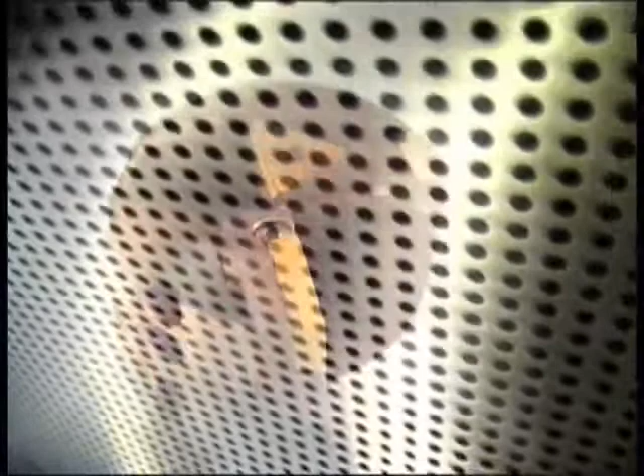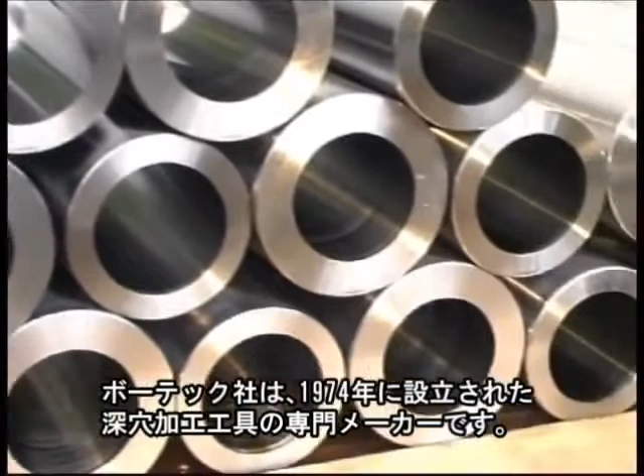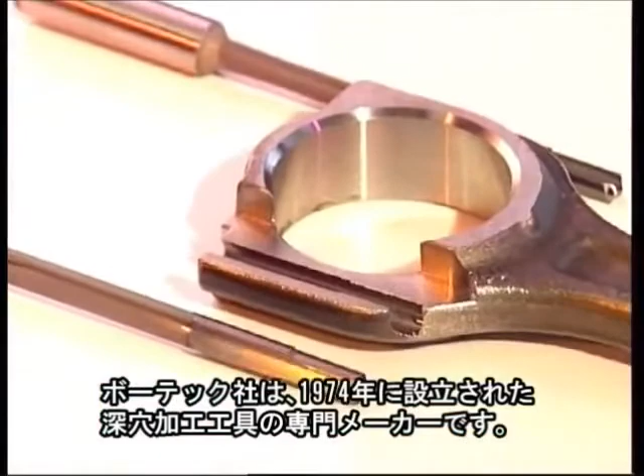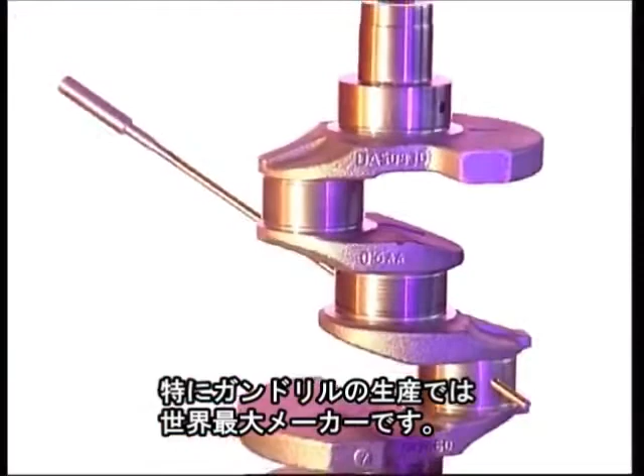Expertise, reliability, quality and flexibility. Since 1974, Botek GmbH has been the market leader in the development and production of deep hole drilling and boring tools. The principle of replacing what is good with what is even better ensures that Botek innovates products for a wide range of tasks and applications in the field of deep hole drilling technology.

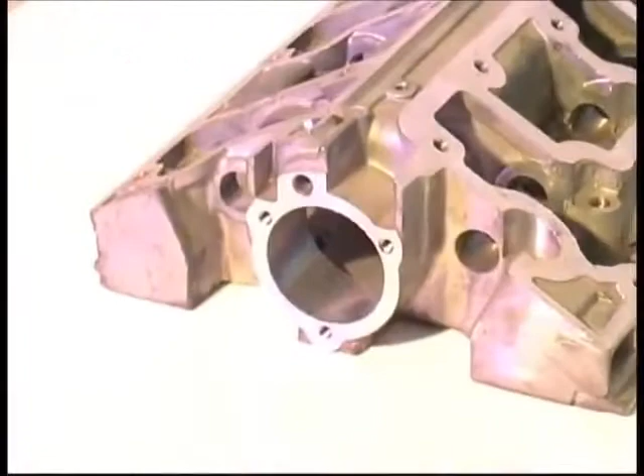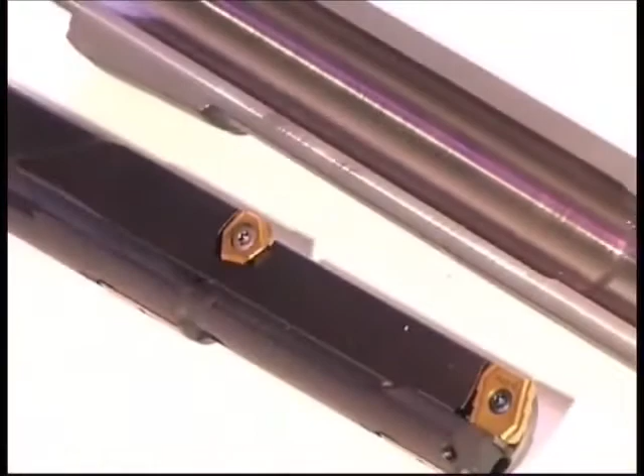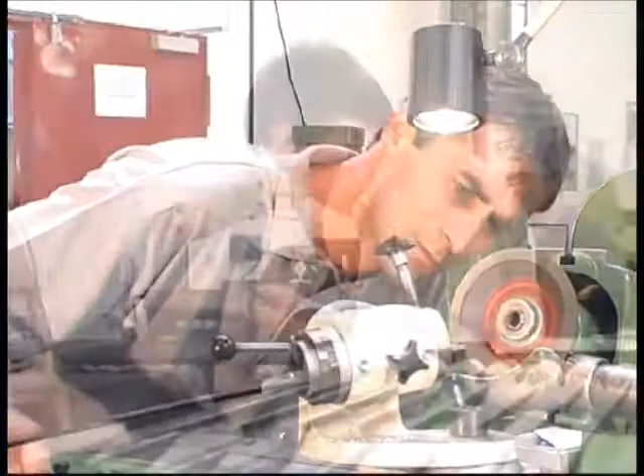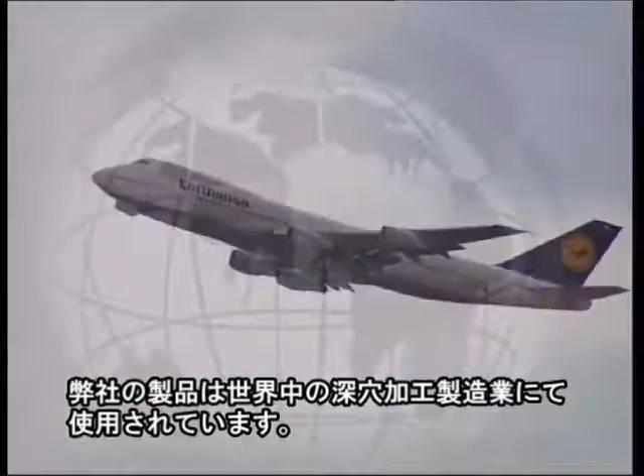In addition to the company headquarters in Riederich near Stuttgart, Germany, Botek has production plants in France, Italy and Great Britain, as well as agencies worldwide. Botek employs 300 people worldwide and exports its products to countries on all 5 continents, and is the world leader in the manufacturing of high-performance deep hole drilling tools.

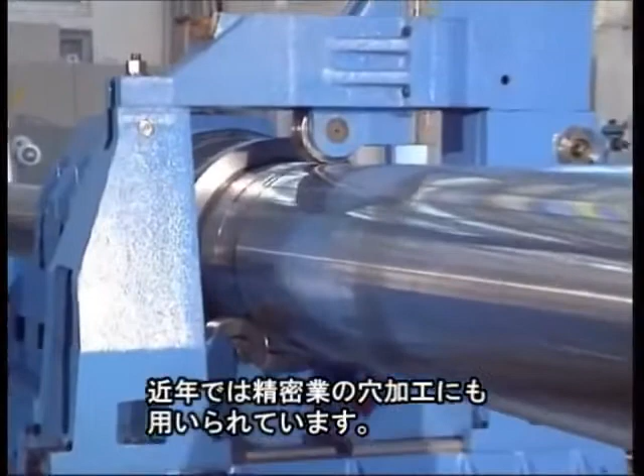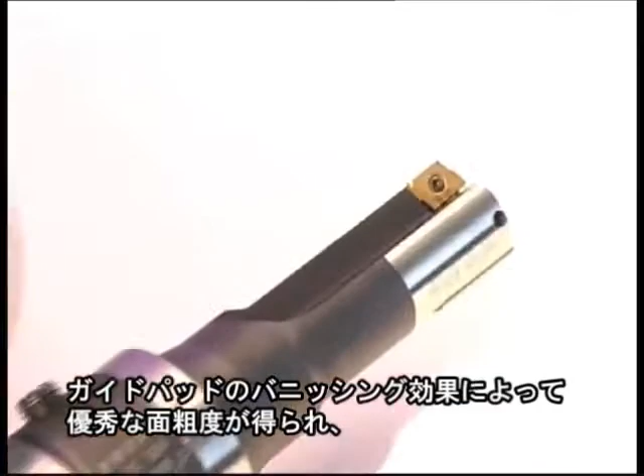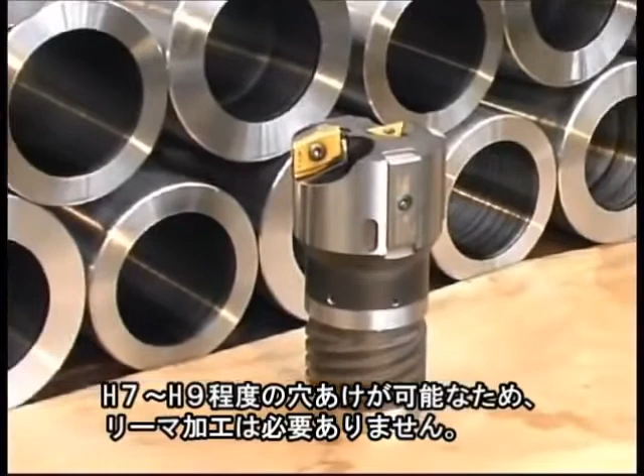Deep hole drilling technology is not only restricted to the production of deep holes. Botek tools are also increasingly being used in the production of precision holes. As a result, in many cases, there is then no need for additional fine boring or reaming operations. Most modern metal machining, where precision drilling is required, should consider Botek drilling tools for the production of deep or shallow precision holes.

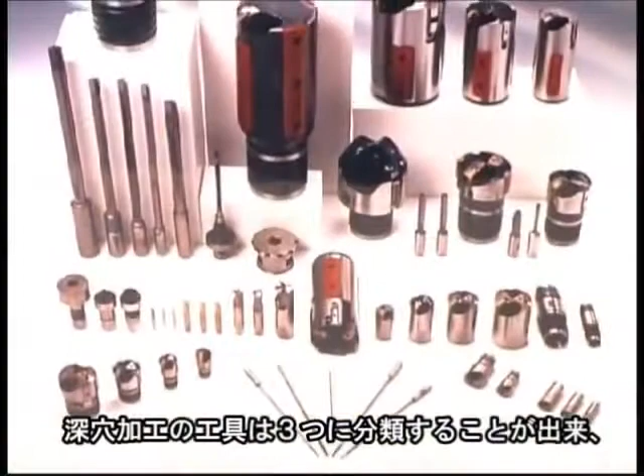A distinction should be made between the 3 deep hole drilling tooling systems: the gun drilling system for diameters of 0.7 to 80 millimeters, the BTA system for diameters of 10 to 500 millimeters, and the ejector system from 18.4 to 200 millimeters.

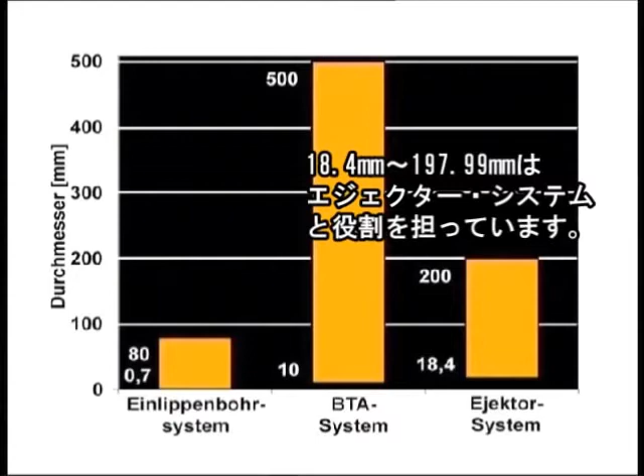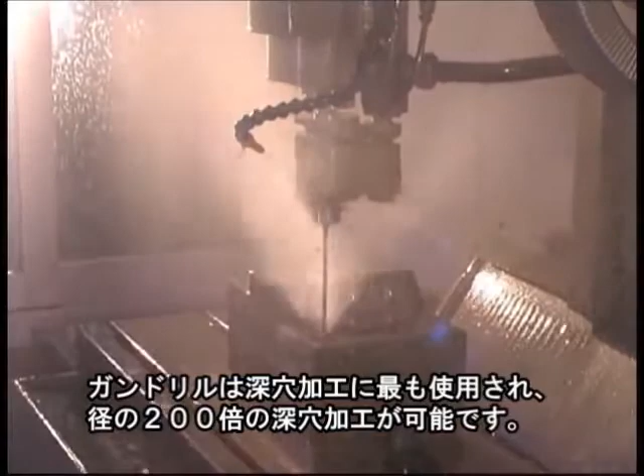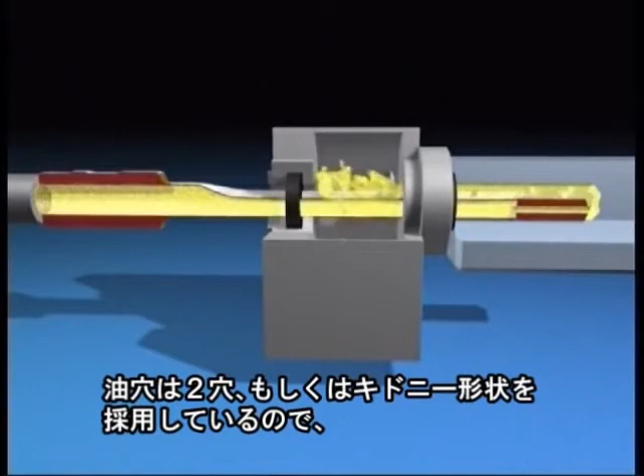The gun drilling system is used most frequently. With Botek gun drills, depths of up to 200 times the diameter can be achieved. The decisive factor here is providing the tool with a sufficient supply of a suitable coolant lubricant, preferably an extreme pressure neat cutting oil which is fed under pressure through the inside of the tool.

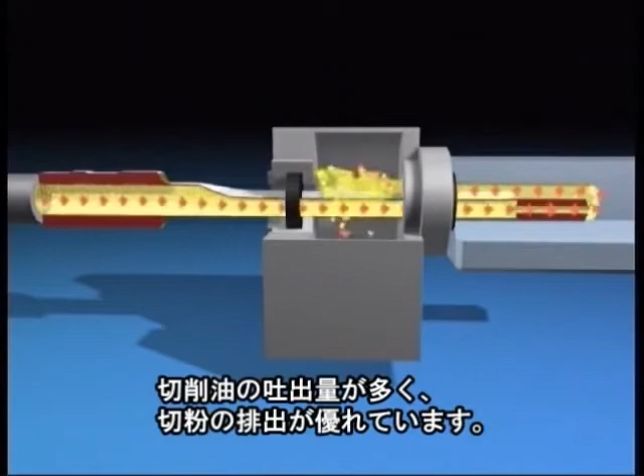In addition to cooling and lubricating the tool cutters and guide pads, the cooling lubricant serves to efficiently remove the chips down the drill flute.

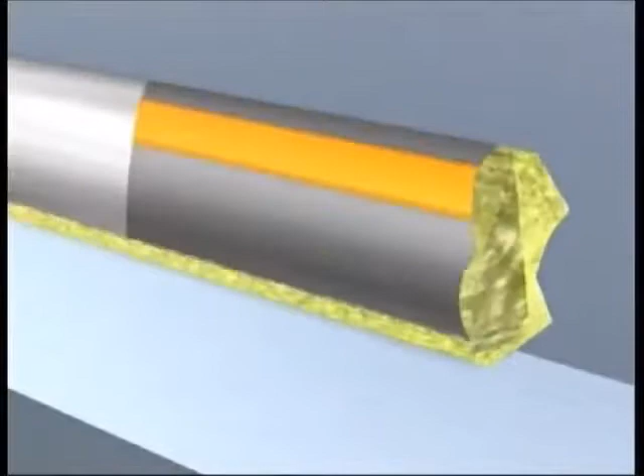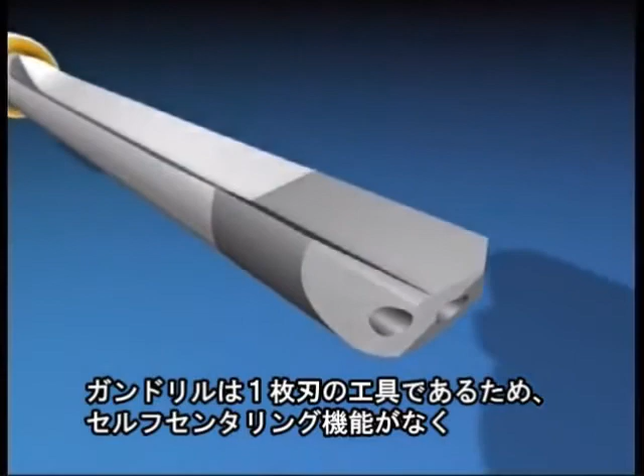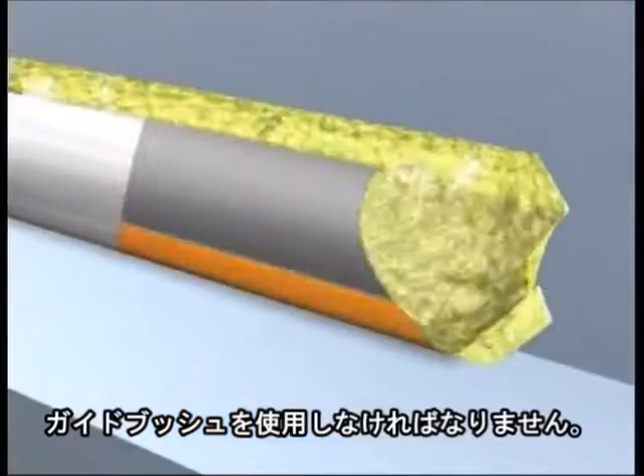The gun drill is a single cutting-edge drilling tool. Since it is not a self-centering tool when starting the bore, it has to be guided through a starting bush. After that, the tool guides itself by means of the guide pads on the drill head. As a result of the cutting forces, the guide pads are pressed against the boring wall, and this results in the characteristic burnishing effect to provide excellent surface finishes.

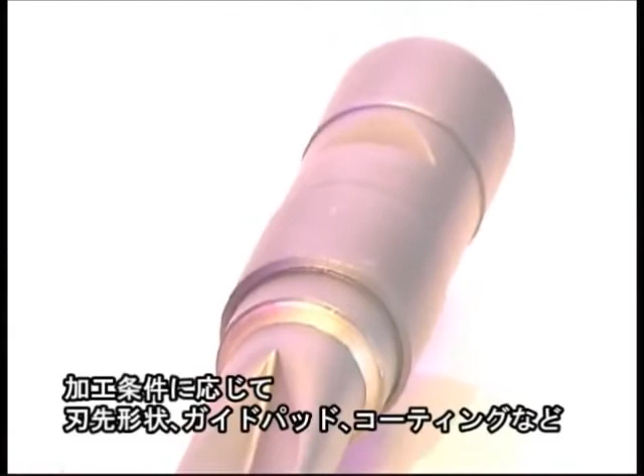The classical Botek gun drill consists of a crimped tubular sleeve with a soldered carbide tip and a clamping sleeve. Depending on the conditions for use, the cutting tool geometry and arrangement of the guide pads on the boring head can be modified.

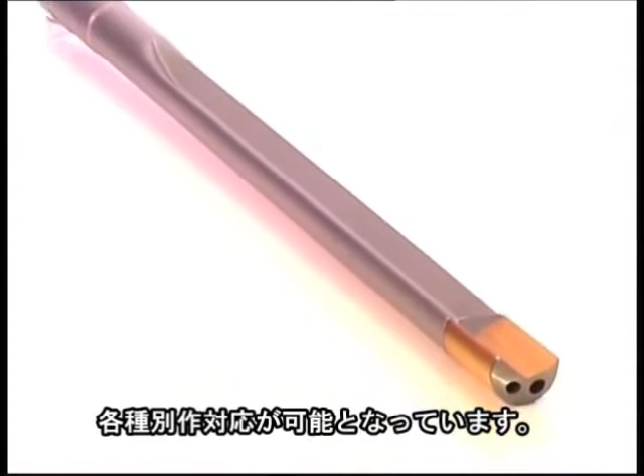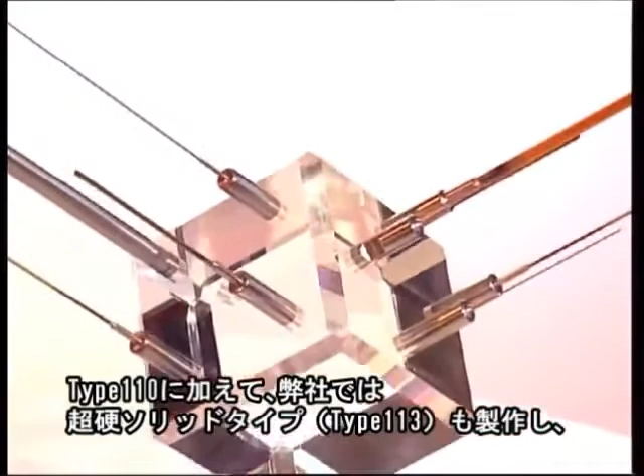In order to further improve the drilling quality, Botek gun drills are also available in a variety of coated versions. In addition to classical gun drills, Botek also offers gun drills made of solid carbide.

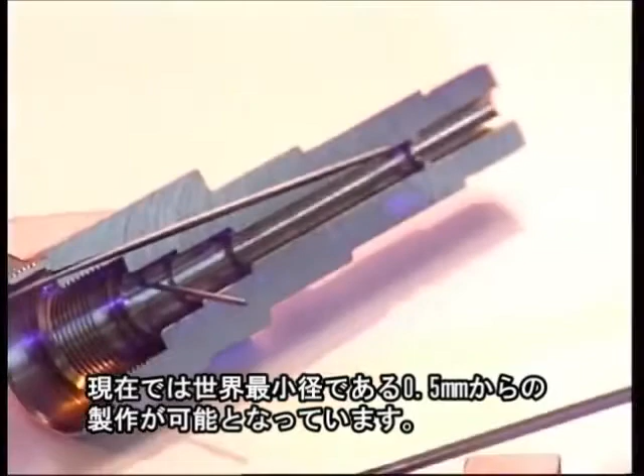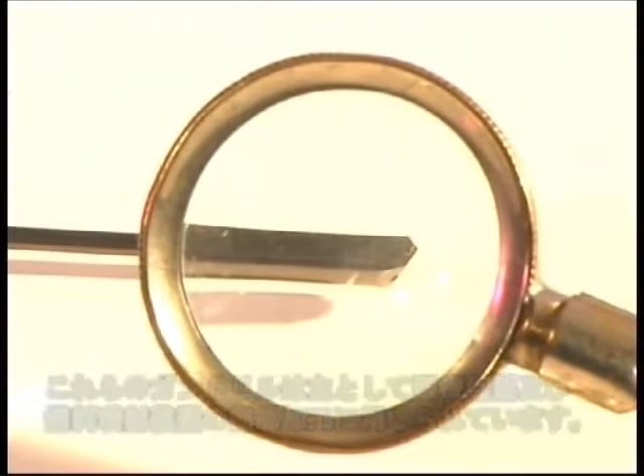As early as 1982, the company was manufacturing solid carbide with a diameter of 3.2 millimeters. The success in the marketplace made it possible to develop these tools with ever smaller diameters. In 1989, the first 1mm gun drill was manufactured. Today, Botek manufactures the smallest solid carbide gun drill in the world, with a diameter of 0.5 millimeters. These drills are used mainly in medical technology and the production of parts for fuel injection systems.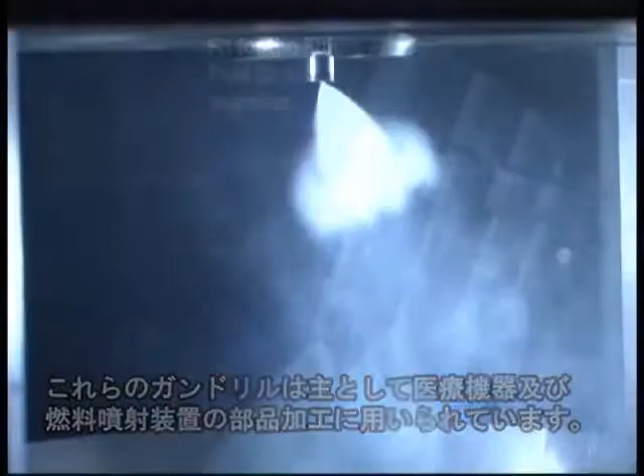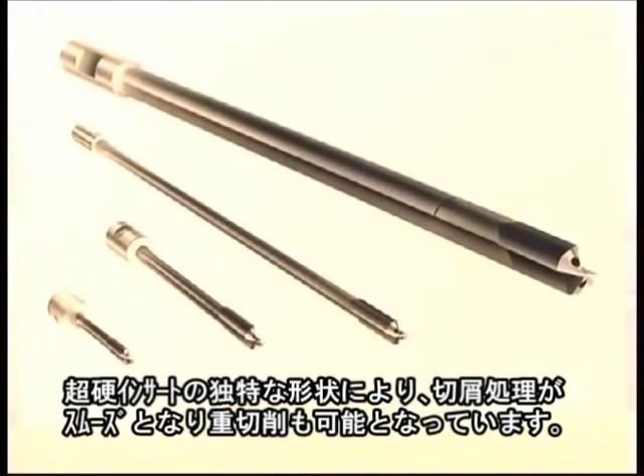For larger diameters, gun drills with indexable inserts and guide pads with a diameter ranging from 18 to 80 millimeters have also now been introduced to the Botek drilling program. The sophisticated cutter geometry of the indexable inserts means that optimum machining results can be achieved on these larger diameter gun drills. Twin fluted drills complete the product range in this area.

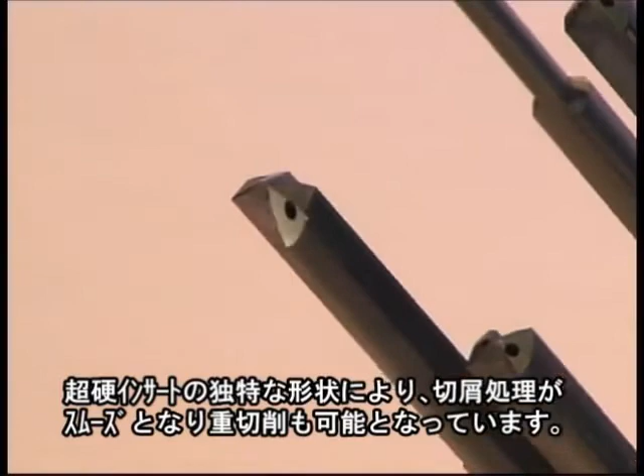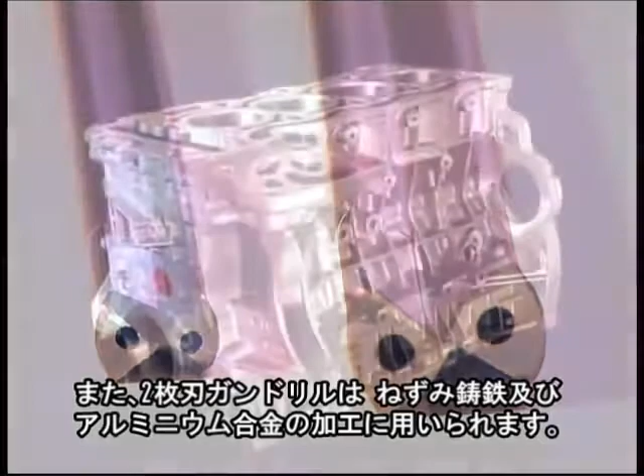The tools also work on the gun drilling principle with internal coolant lubrication supply and external chip removal. They are characterized by their especially fast machining performance. Botek 2-flute drills are used exclusively for the machining of grey cast iron and short-cutting aluminium alloys. The tools are available in a solid carbide version as well as conventional soldered carbide tips.

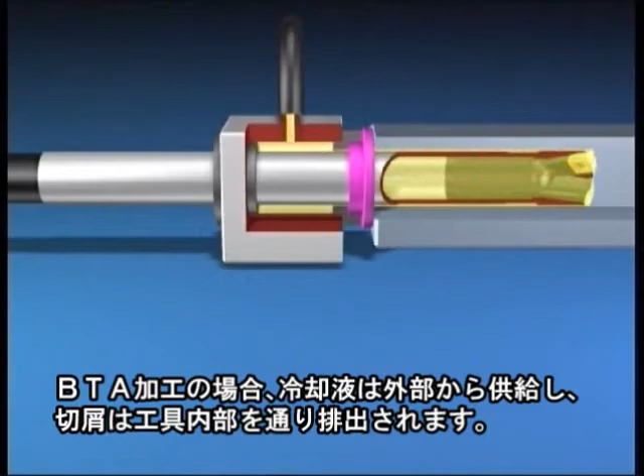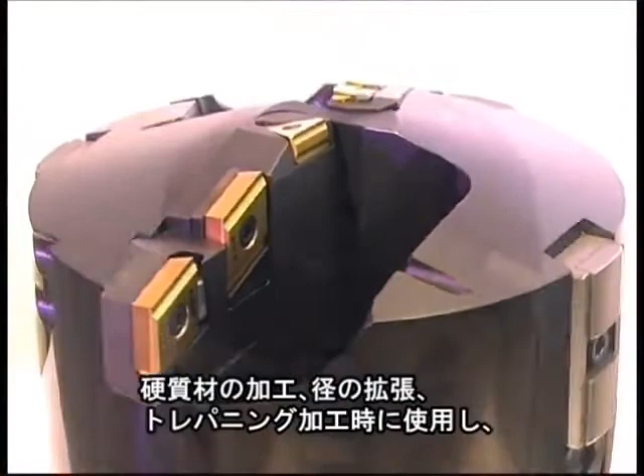In the case of BTA drilling tools, coolant is supplied from the outside. Under pressure, oil enters the annular space between the bore wall and the boring bar. The chips are removed through the inside of the boring tool. Tools can be supplied for solid drilling, counterboring, and trepanning.

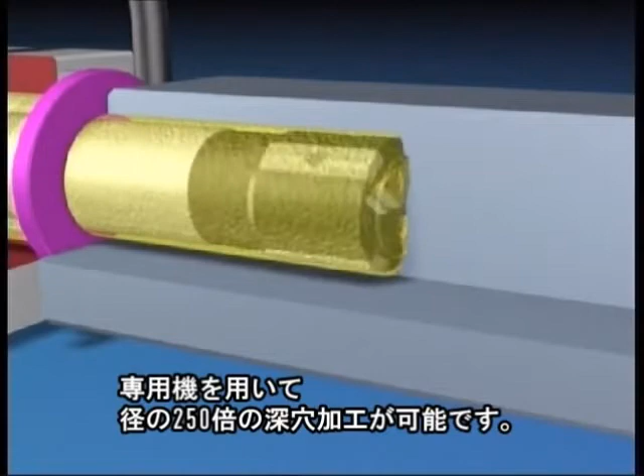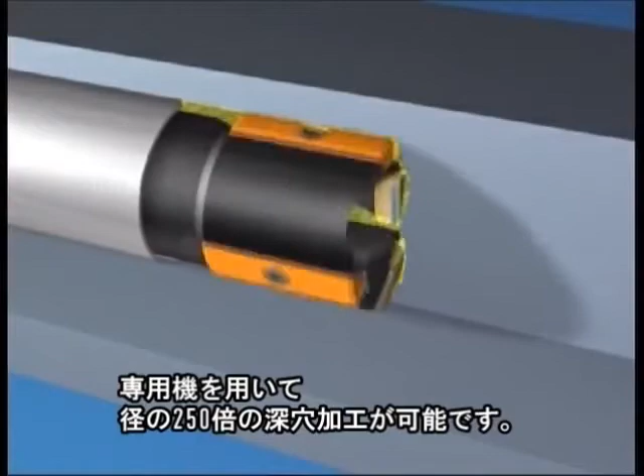The BTA technique is used exclusively on deep-hole boring machines, permitting drilling depths of up to 250 times the diameter. BTA drilling tools are characterized by their high machining performance, providing precision hole geometry and the minimum run out of the bore produced. Botek BTA drilling tools are available from a minimum diameter of 18 millimeters with indexable inserts and guide pads.

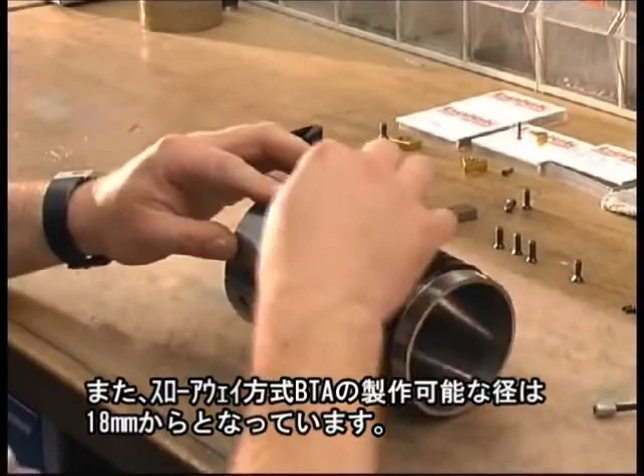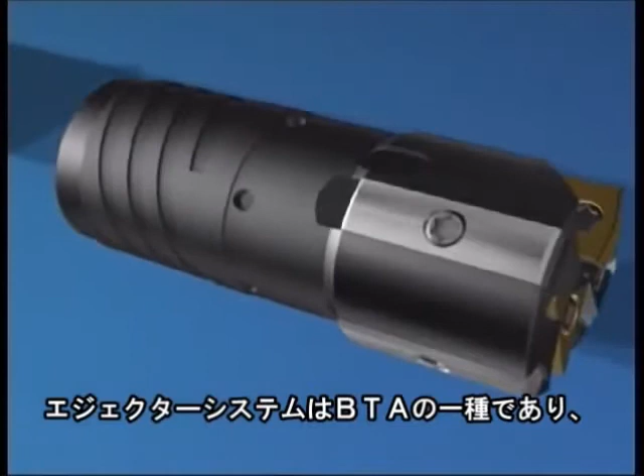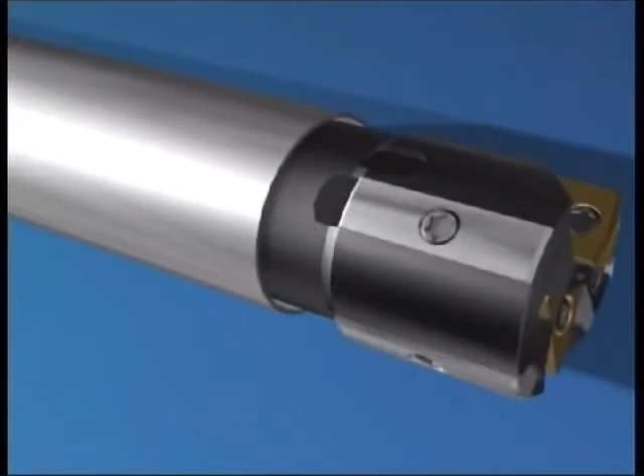The ejector drilling system is a variant of the BTA principle. The necessary tools are supplied by Botek in the diameter range from 18.4 to 200 millimeters. The method is mainly used on conventional machine tools as no sealing is necessary between the workpiece and the drill bush. Ejector drilling is especially suitable for use on turning machines, milling and horizontal boring machines.

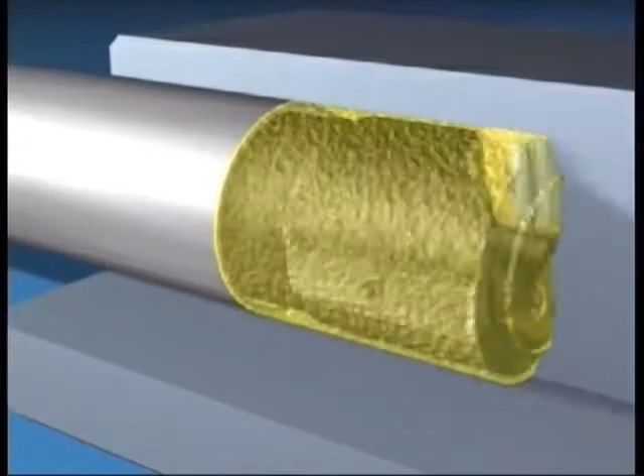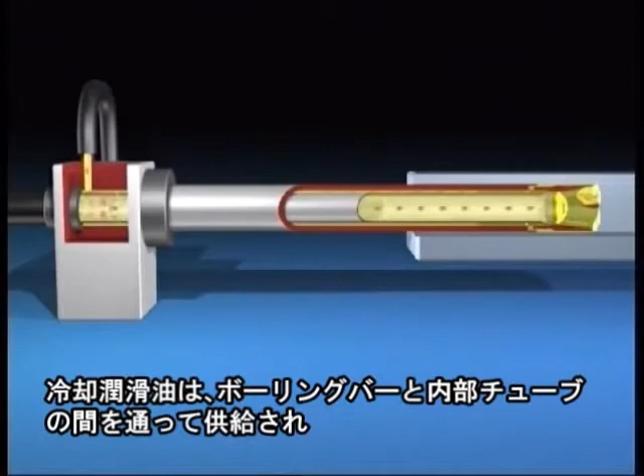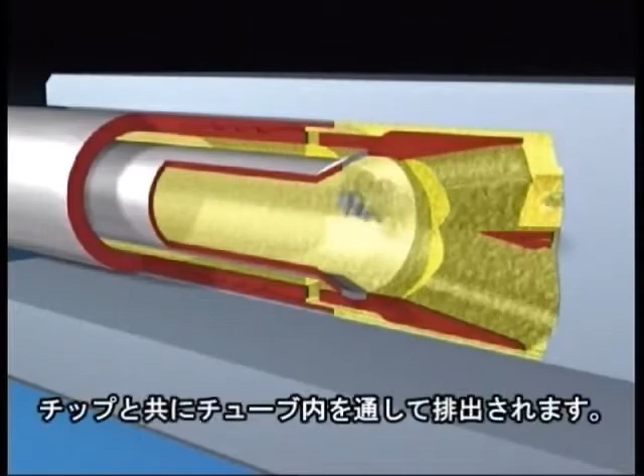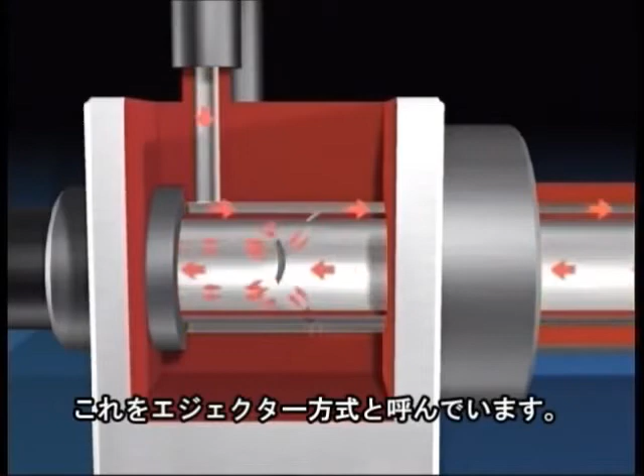The coolant lubricant is supplied through an annular space between the boring bar and an internal tube. The oil comes out at the side of the boring head, and this removes the chips through the internal tube. The lubricant is injected directly into the internal tube via an annular jet. As a result of the low pressure on the chip mouth, the cooling lubricant is removed together with the chips. This is the so-called ejector effect.

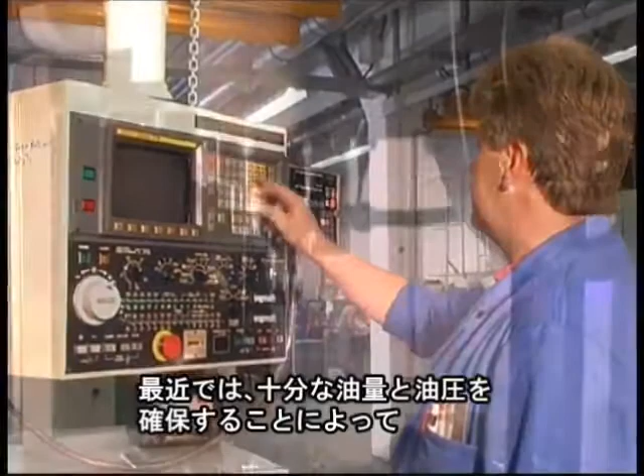To an increasing extent, deep-hole drilling tools are also being used on modern CNC machining centers and lathes. It is essential that the machine in question is equipped with a sufficient coolant volume and pressure. To start the bore on a machining center, gun drills need a guide hole in the workpiece.

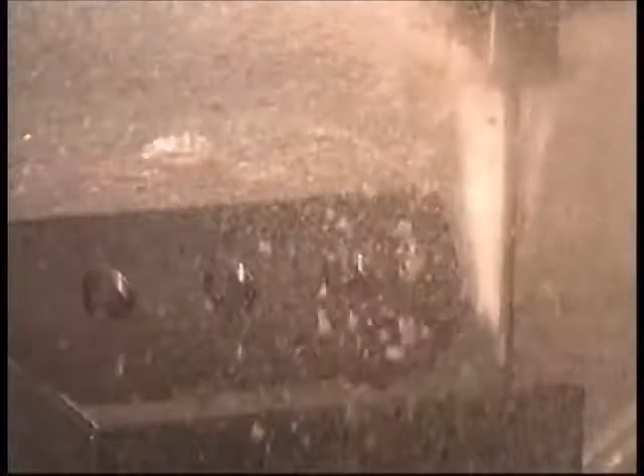During the drilling process, the chips are washed out of the hole together with the coolant lubricant. In this way, drilling depths of up to 40 times the tool diameter and more can be achieved without separate chip removal. In order to guarantee the highest possible process dependability, the correct choice of tool in combination with the individually appropriate cooling lubricant is of prime importance.

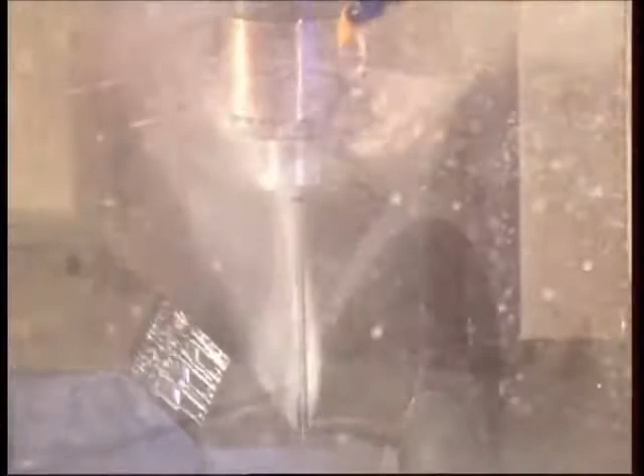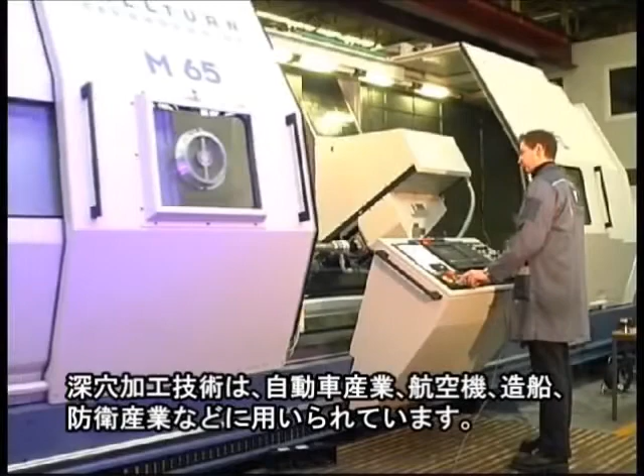Application areas for deep-hole drilling technology are the automotive industry, aircraft, hydraulics and pneumatics industries, as well as shipbuilding and defense technologies. Here, Botek is constantly setting new standards for industry. As part of this development, Botek is cooperating with leading machine manufacturers and other users, both in Germany and in countries all around the world.

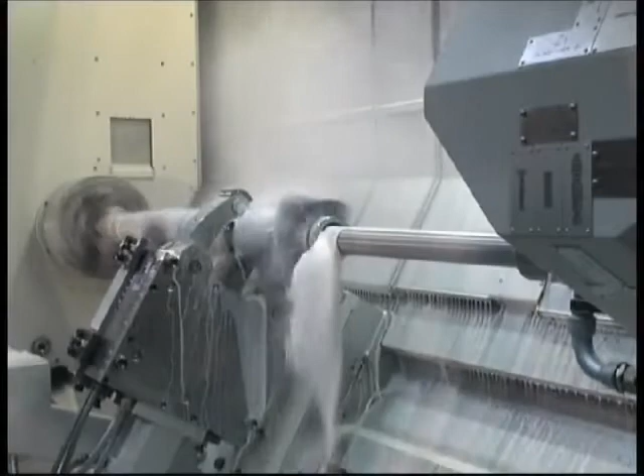A high quality standard is necessary to do justice to our customers' requirements. With the production of economical and technically advanced deep hole drilling tools and certification according to ISO 9001, Botek is systematically meeting the requirements of the international marketplace.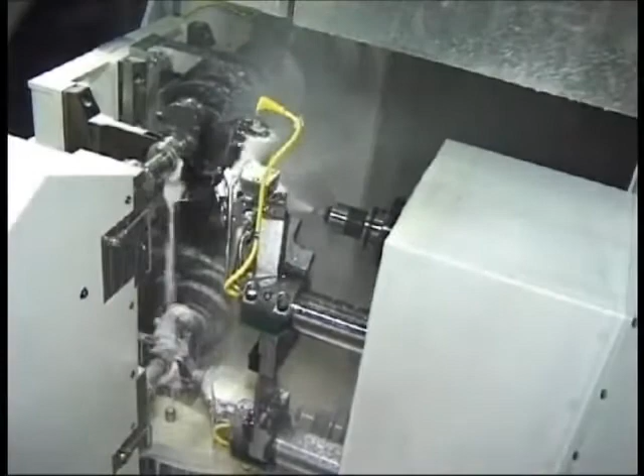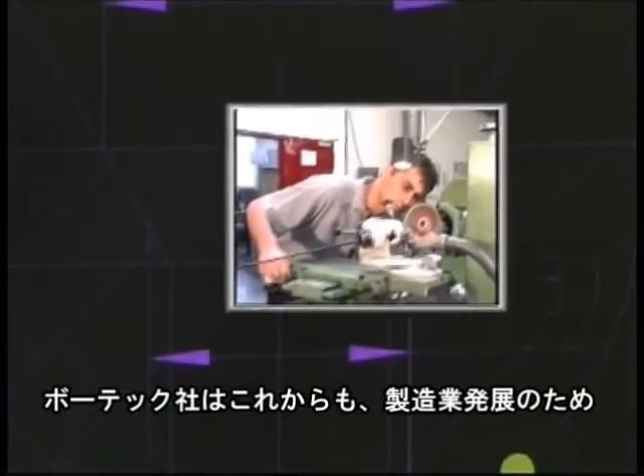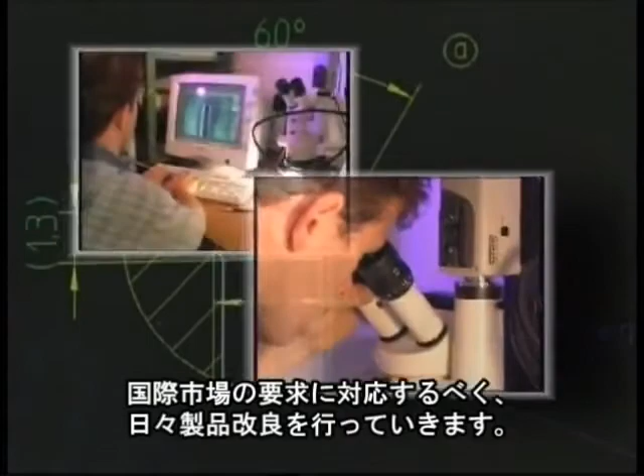The hallmark of Botek is practical-orientated research and development work. The necessary know-how for all members of staff is provided in special training sessions. The training of tomorrow's engineers at our headquarters in Riederich makes sure Botek remains the leading technology company in deep hole drilling. Only qualified specialists are a guarantee of high-quality products.